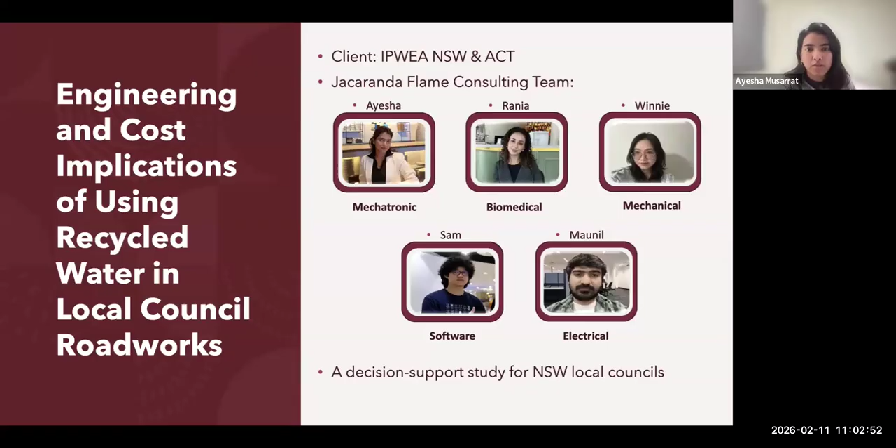This study examines how recycled water can be used in local council roadworks across NSW in a way that remains technically reliable, compliant with existing regulatory frameworks, and operationally practical for councils. Rather than focusing on whether recycled water can be used in principle, our work concentrates on identifying when its use is appropriate in practice, where the real engineering and operational risks arise, and what verification steps councils would need to make confident decisions.

The motivation for this study began with growing water scarcity pressures across many regions of NSW, which are prompting greater consideration of alternative water sources in construction activities. Across both the literature and industry consultation, we observed that councils are increasingly encouraged to consider recycled water due to water scarcity and broader sustainability objectives. However, once recycled water enters the discussion, councils often face uncertainty, not only around engineering suitability, but also around cost behavior, logistics, and compliance expectations.

These uncertainties can slow adoption, even where recycled water may be technically viable. This creates the need for a structured decision support framework that links engineering feasibility, regulatory requirements, and delivered cost considerations into one single practical pathway, enabling councils to adopt recycled water where it is justified while maintaining engineering performance and compliance.

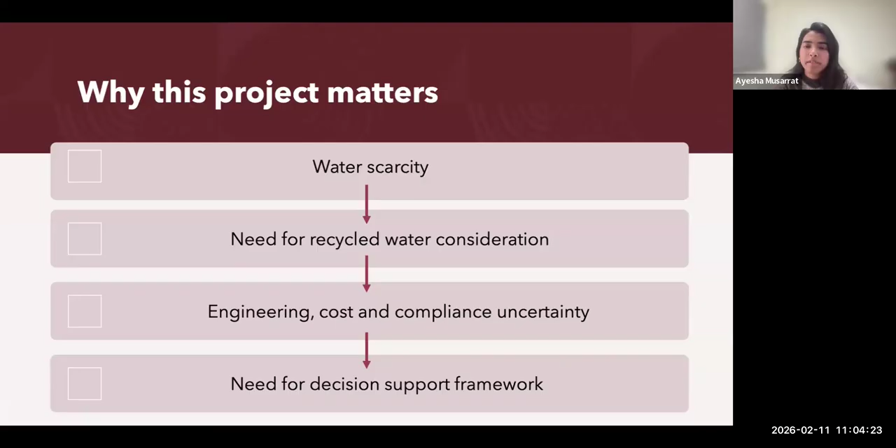In response to this need, this project focused on applications where councils most frequently make operational water source decisions, particularly dust suppression and compaction, and evaluated them through both engineering and cost lenses.

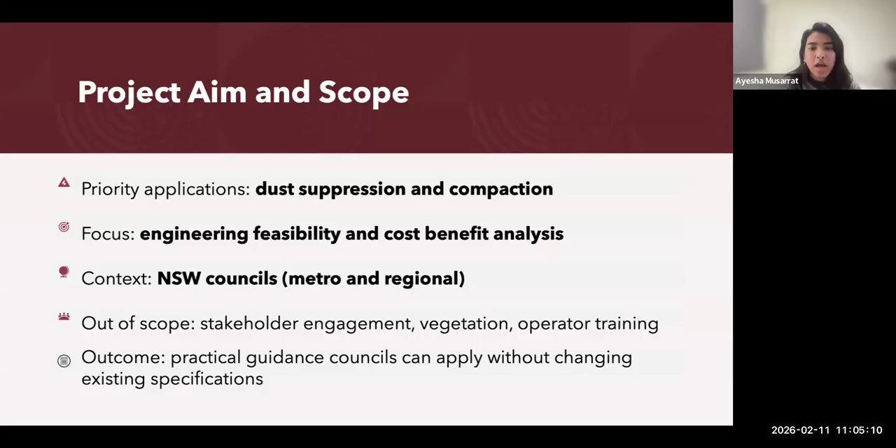Our project was not to introduce new technical limits, but to translate existing specifications and guidance into clear decision triggers that councils can apply consistently across both metropolitan and regional contexts. The intended outcome is practical guidance that fits within current standards and procurement processes, allowing councils to make defensible site-specific decisions without needing to change existing specifications.

To develop this framework, we followed a structured process. We began with a review of prior JFC work, regulatory guidance, Australian standards, and transport specifications to identify the engineering constraints that actually influence recycled water feasibility.

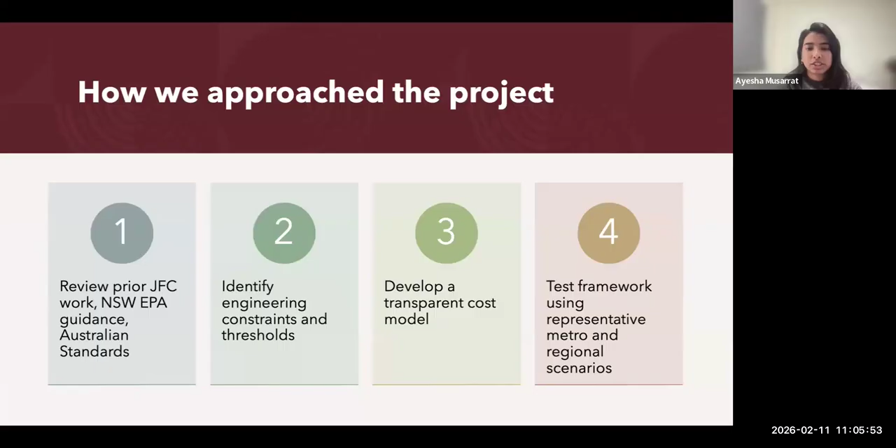We then developed a transparent delivered cost model that captures both water acquisition and logistics factors, before applying the combined engineering cost framework to representative metro and regional case scenarios. This allowed us to test how decisions change depending on local conditions rather than relying on a single generic assumption.

Building on our overall approach, we looked at how councils actually decide whether recycled water is an option for roadworks. One key finding is that recycled water isn't governed by a single rule. Instead, it sits across several frameworks that each deal with a different part of the decision.

At a national level, AGWR provides a risk-based foundation focused on health and environmental protection. It's not road specific, but it does apply to construction activities like dust suppression and compaction. The NSW EPA and NSW Health then turn that into practical constraints around when recycled water can be used and how exposure is managed on site. In parallel, Austroads also provides performance benchmarks that still apply irrespective of whether potable or recycled water is used.

The key message for councils is that recycled water is not excluded by default. Rather, its use depends on demonstrating suitability through appropriate risk controls and technical verification.

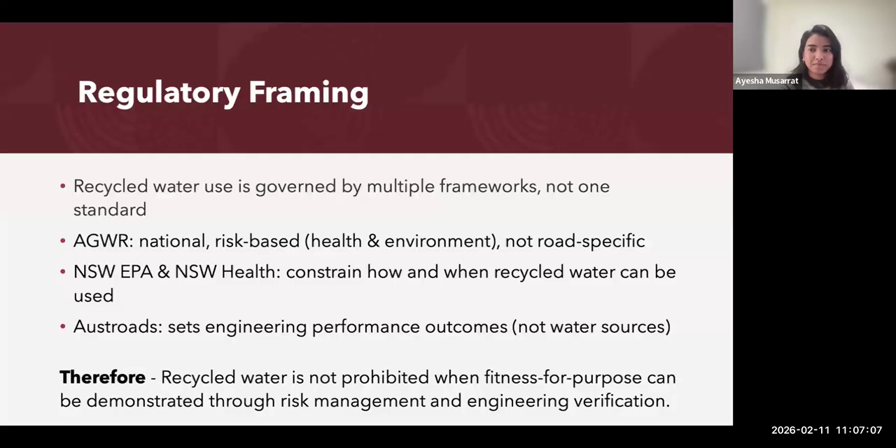We'll now take you through the technical considerations of the project.

Once councils know recycled water can be an option, the next question is usually, what do we actually need to worry about? The literature is surprisingly consistent on this. From an engineering point of view, most of the sensitivity comes back to how water interacts with soil, especially during compaction.

That's why salinity, or EC, is the main driver of engineering sensitivity, because it can affect moisture to density behavior and durability. Closely linked to that is SAR, which becomes important in clay-rich soils due to dispersion and soaked strength effects. On the other hand, things like turbidity and solids don't usually change pavement strength, but mainly affect operational reliability, like spray systems and downtime. Parameters like pH and specific ions are generally secondary, unless stabilization or concrete is involved.

Rather than asking councils to assess everything, the evidence supports focusing decision making on a small practical subset of parameters, especially salinity and SAR.

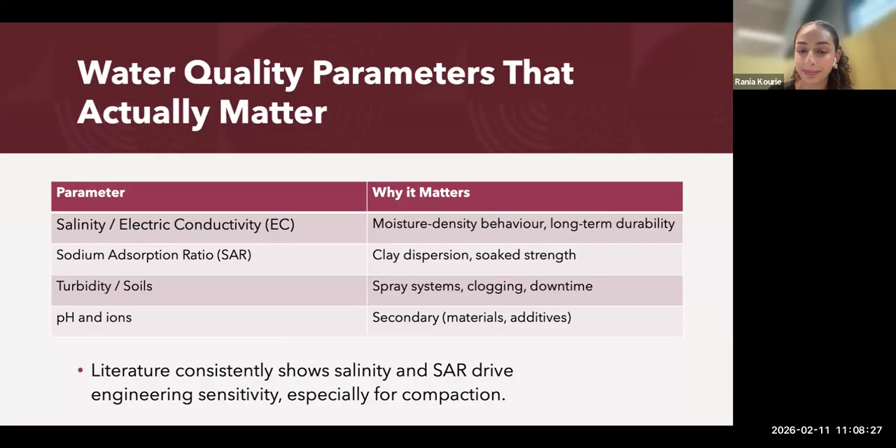When we translate the water quality evidence into actual roadworks, the level of risk really depends on the application. For dust suppression, recycled water is generally a low structural risk—the water stays at the surface, so the focus is on exposure, runoff, and day-to-day operational reliability. Compaction is where the risk concentrates, so water chemistry can affect soil behavior and longer-term performance, even when density targets are met on the day.

Concrete is different again because it's governed by AS 1379, so suitability is demonstrated through testing and compliance, not engineering judgment. But the key takeaway for councils is that short-term construction checks don't always tell the whole story. That's why the literature supports a risk-based approach, using verification where sensitivity is high, rather than assuming recycled water behaves the same as potable water.

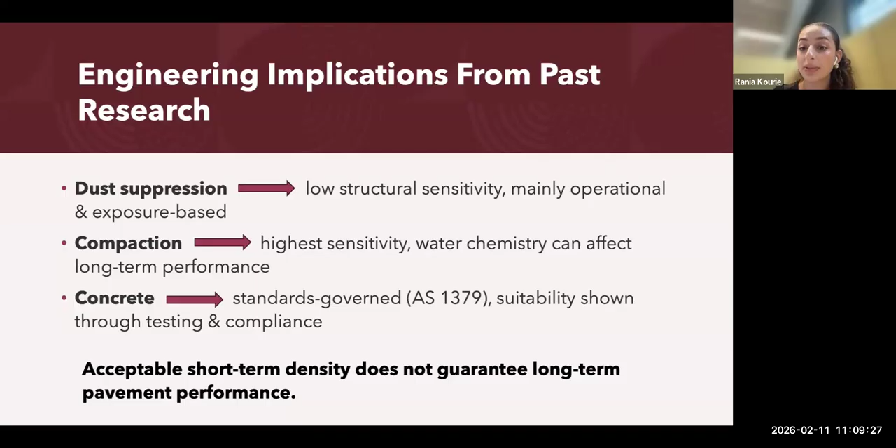And that becomes especially important for stabilization, which is why the next section looks at stabilization as a special case.

So while compaction is the most sensitive routine application, stabilization really sits in its own category, which is why we looked at it separately. It's already a tightly controlled process where performance is driven by moisture, mixing, curing, and quality assurance, with the water source just being one input.

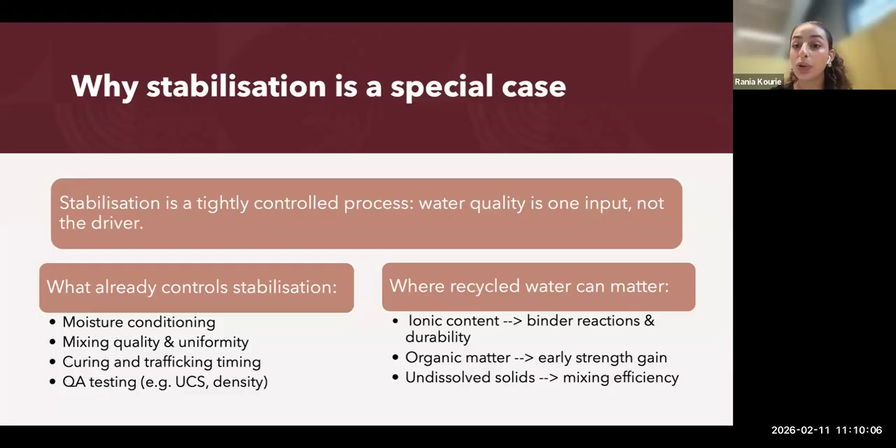So the key question for this project wasn't whether recycled water changes stabilization, but whether it adds uncertainty beyond what engineers already manage. From the literature, that uncertainty mainly comes from chemistry, where salts can affect binder reactions, organics can slow early strength, and solids can influence mixing quality.

That doesn't necessarily make recycled water unusable, though. It just means that it shouldn't be assumed equivalent to potable water without checks. So for stabilization, the real issue isn't compatibility, it's verification and confidence.

A useful finding from this work is that New South Wales already has decision thresholds in place. Existing Transport for New South Wales specifications set limits for chlorides, sulfates, solids, and microbiological indicators for when recycled water is used. So we're not proposing new limits, we're simply showing how these existing limits can be used as clear screening points.

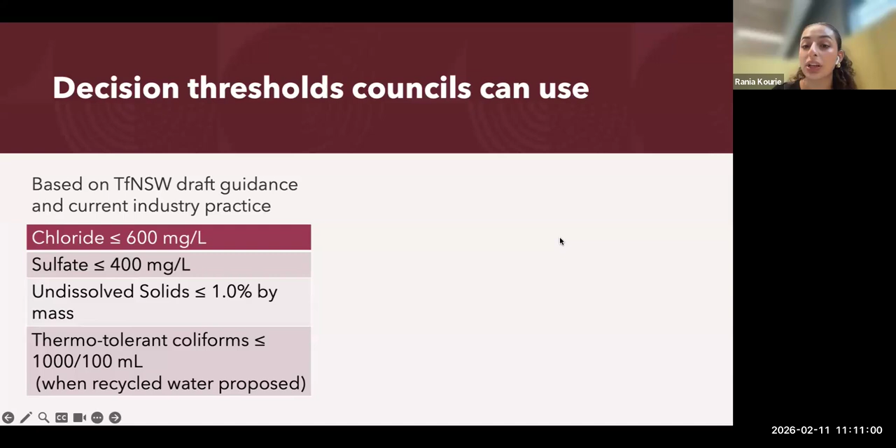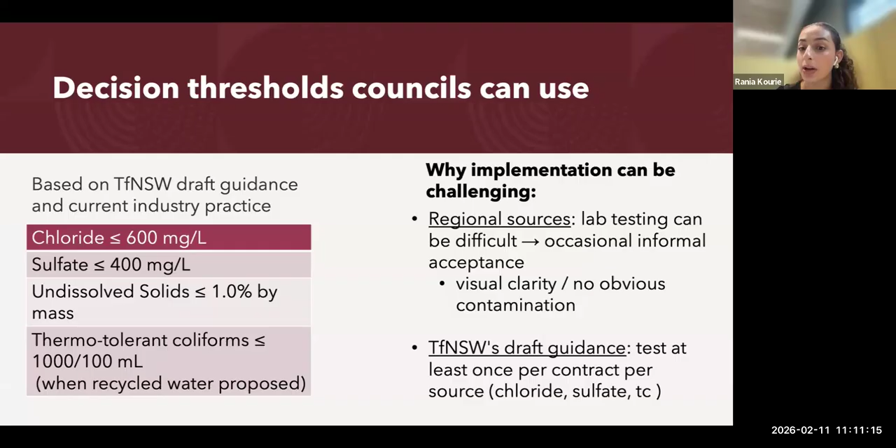This is especially important in regional areas where regular lab testing isn't always easy. That's why our framing of this suggests baseline testing per contract and per source—enough to maintain confidence without necessarily overcomplicating any projects.

This slide puts everything together into a simple decision pathway for councils. First you identify the stabilization method and the relevant TfNSW specification because limits depend on the engineering context. Next, you confirm the water source and whether access and continuity are actually realistic on site. You then apply a basic threshold screen.

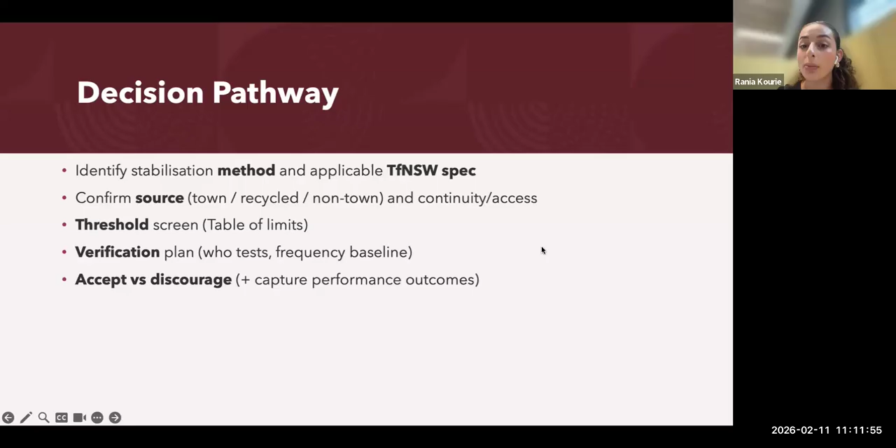If the limits can be met, the focus shifts to verification—who's testing and how often? Where limits are met and verification and QA are strong, recycled water is conditionally acceptable. If limits can't be met or verified, recycled water becomes higher risk and is generally discouraged for councils to use. So the key point is that this pathway doesn't add new rules, it just organizes existing ones in a consistent way.

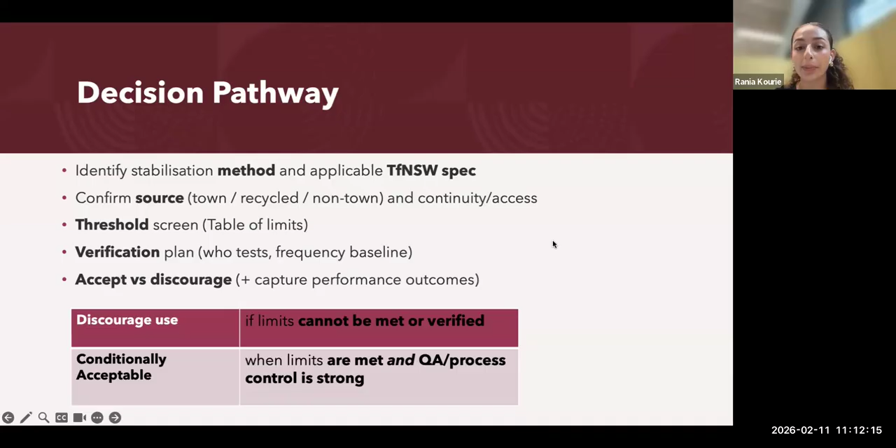Industry feedback supports this. Contractors indicated that potable water is usually used because it's easier to access and verify, not because recycled water fails. Where recycled water meets specification limits and stabilization controls are strong, there's no evidence of inherent incompatibility. So in practice, stabilization decisions come down to confidence in verification, traceability, and process control rather than concern about the recycled water itself.

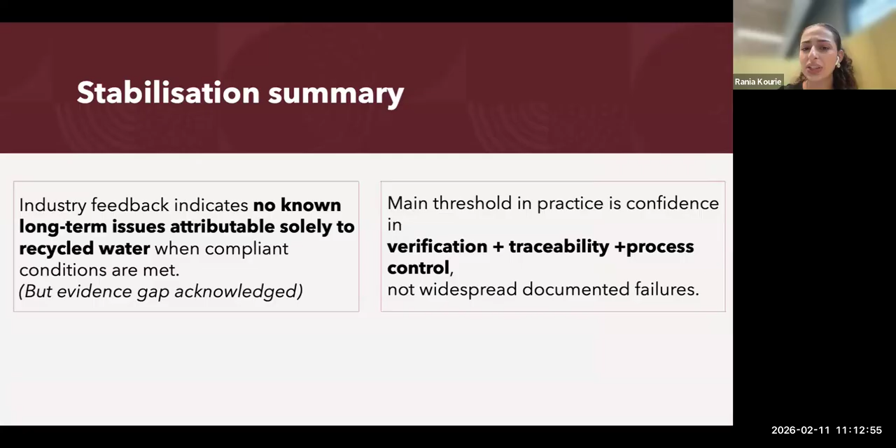So once we understand where recycled water makes technical sense, the next question councils always ask is, what does it cost? I'll hand over to Sam, who will walk us through the cost model and how these technical decisions actually translate financially.

All right, thank you. So I'll be talking about the cost model structure. This will be used in the coming sections, which will have case studies that go through the technical framework previously mentioned and the cost model structure, which I will talk about.

The purpose is to compare delivered cost of different water sources through different conditions. The tanker volume from research is around 8 to 12 kiloliters, and with council contact we are told to assume around 10 kiloliters per load as an average, unless specified otherwise. The scope is that this is an indicative planning model, not tender pricing or some kind of financial strategy.

So in terms of the variables we will put in, we can go next.

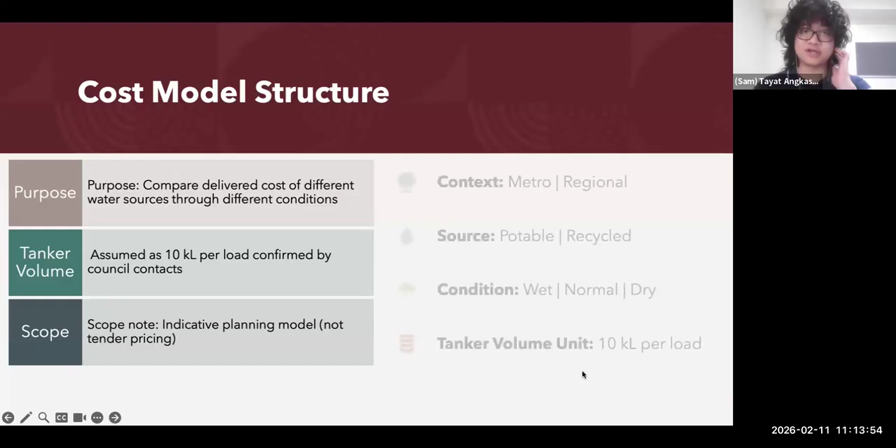The context will be between metro and regional council, where in our case we are using Fairfield and Tweed Shire Council as comparison. The source is potable water versus recycled water in three conditions: wet, normal, and dry, and the tanker volume unit previously mentioned, 10 kiloliters unless specified.

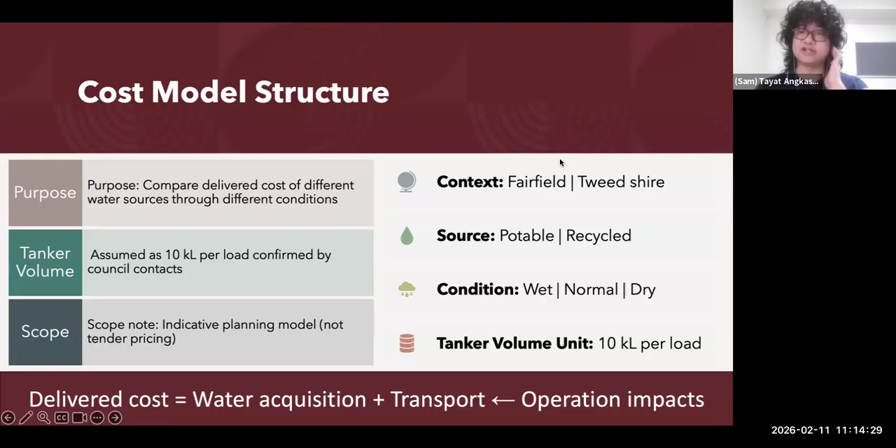The final delivered cost model will be the sum of water acquisition costs, travel costs, and in case operation impacts affect that transportation cost. We also identified that transportation cost is the main cost driver.

The water acquisition cost requires the price at fill point and tanker volume, unless specified. The tanker volume will be assumed as 10 kiloliters per load, as mentioned. The potable water is usually easier to find the cost for directly, so this model may apply a bit better for recycled water.

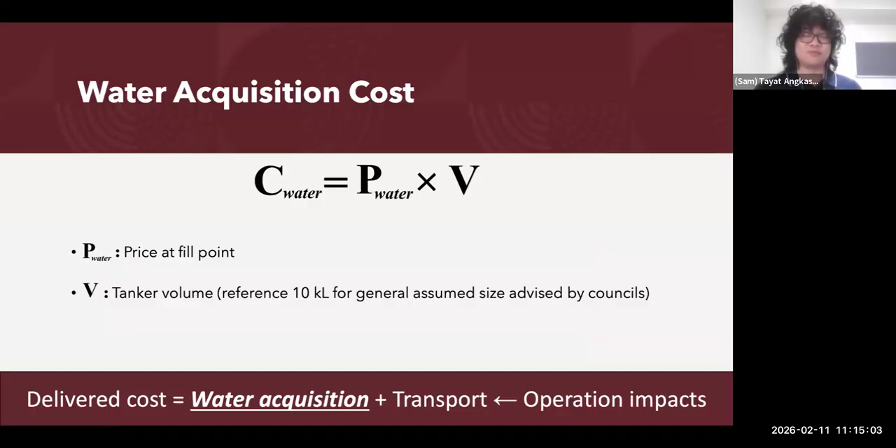Next, the transport cost is modeled on a time basis. Usually water carts are commonly hired on wet hire or hourly rates. Let's define wet hire: it refers to hiring equipment alongside an operator or driver, where usually fuel or other standard operating costs are considered within the hourly rate, but they may vary depending on the contractor.

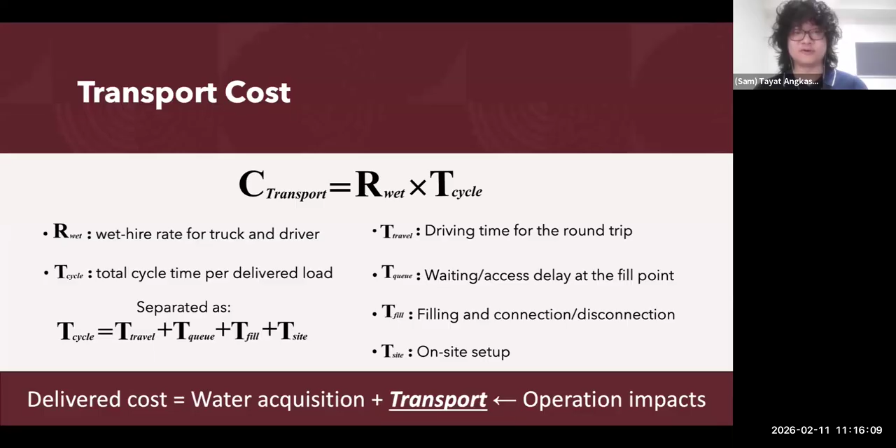The total time cycle for one delivered load is split into four sections as shown. Travel time is to go towards the destination and back. The queue time is waiting for access if there's other tankers or people on site. The fill time is to fill the tank and connect, disconnect, and other on-site operations.

This is if the operation impacts have a noticeable impact towards the transport cost change. We use lambda to represent the fraction of time lost to downtime, where near zero is considered negligible, and near one as a major impact, which high impacts will cause the increase in time and therefore the cost.

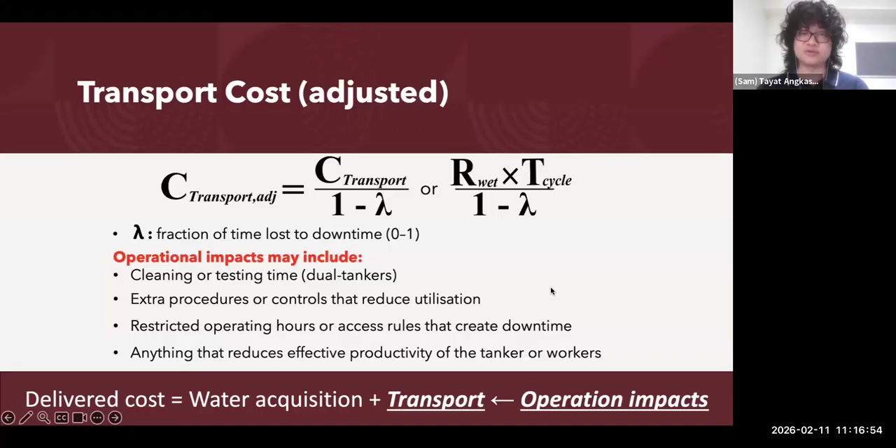The operational impacts can represent things like cleaning and testing when switching between recycled and potable use. Dual tankers require extra cleaning and may cause more delays compared to normal tankers. There are also access restrictions or extra procedures that slow turnaround, or anything else that reduces effective productivity. You can think of lambda as a fraction of paid time you can't spend doing delivery, like a percentage.

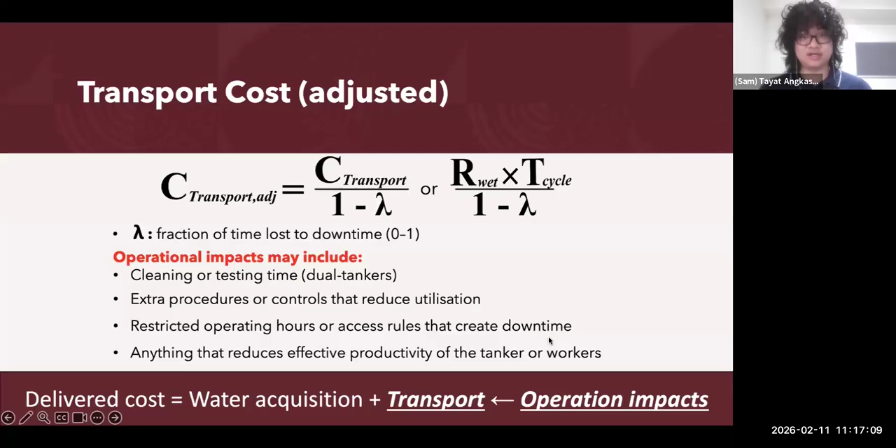In different conditions, these variables may be affected. For example, increased time leads to increasing wet hire cost, or in a dry period, demand and restrictions may cause delays, or some fill points may be considered unusable or unreachable, so they have to change to different operating sites, increasing distance or changing the queue time in that case.

Any on-site operations and travel speed can vary with congestion, site access, or operating rules or restrictions. There may also be more downtime or utilization costs, especially in dual-use tankers, which may need extra cleaning and testing. So increasing time or damaging equipment will most likely increase costs overall.

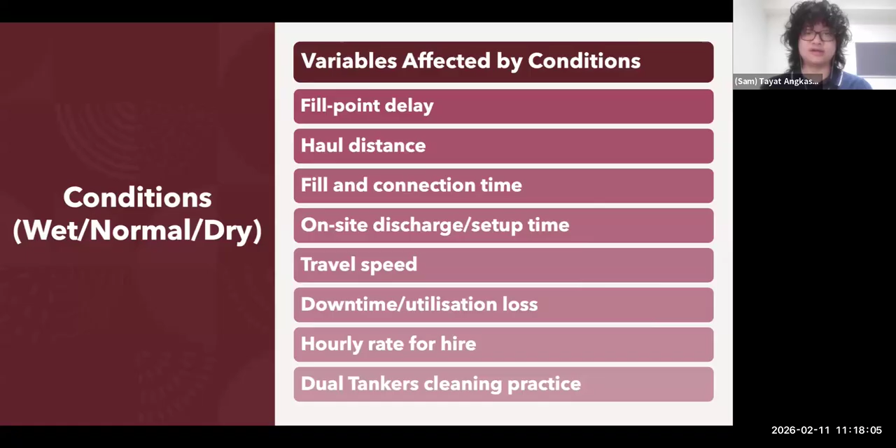In summary, we compared delivered costs per 10 kiloliters load across the scenario by changing the council context between metro and regional—in our case, Fairfield and Tweed Shire—the water source between potable and recycled, and within three conditions of wet, normal, and dry. The delivered cost is split into three parts: water acquisition cost, transport cost, and, if operation impacts apply, their effect on overall transport cost.

The aim is to create a consistent structure that councils can populate with local values, and unless specified, you can use an assumption like 10 kiloliters per load for a quick comparable cost check. As mentioned before, this is not a financial strategy or tender pricing. I'll hand over this to the next person.

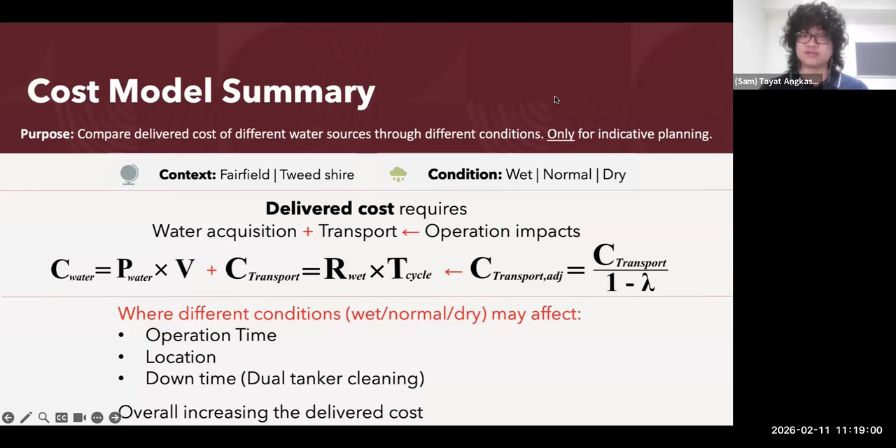The next section will focus on the metro and regional case studies. Winnie will walk through the outline of the case study, which will use the previous technical frameworks previously mentioned, and then the cost framework I just talked about.

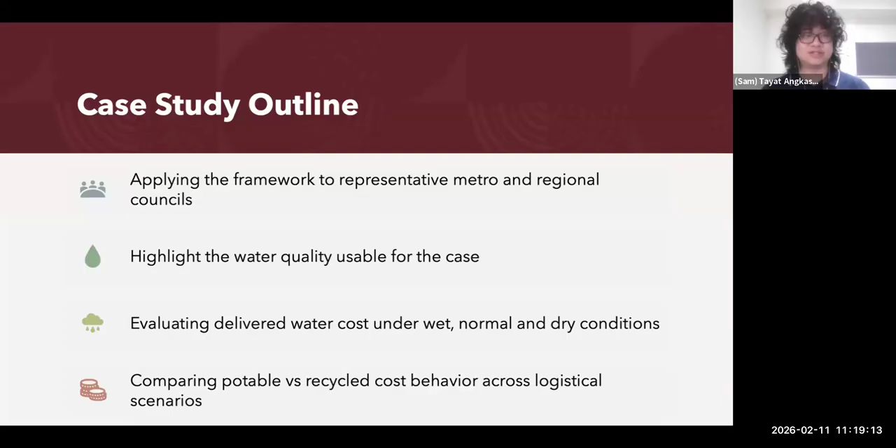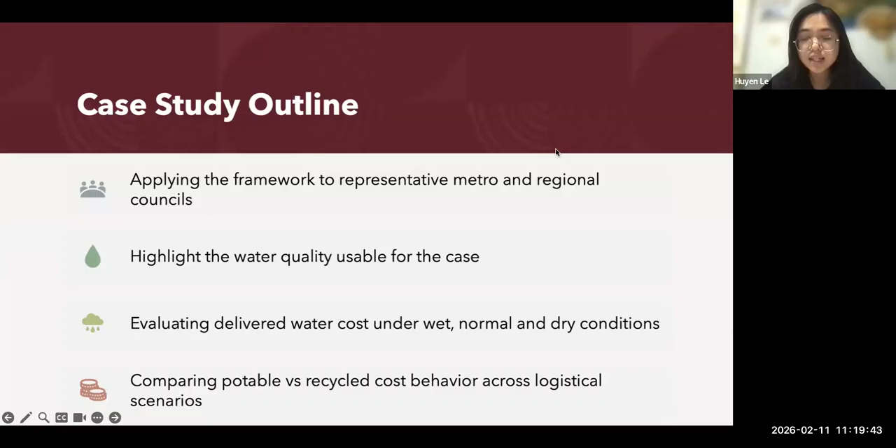In the next slides, the cost framework will be applied to Fairfield and Tweed Shire City Council as representatives for metro and regional councils. For each case study, the water source and quality will be assessed, and the cost will be considered under different circumstances, including wet, normal, and dry. At the end of this section, a comparison will be introduced to highlight the impact of metro and regional unique characteristics on water costs.

First is the metro case study for the project, and we're focusing on Fairfield City Council. Fairfield is a good metro example because recycled water is already available through a major scheme, the Rose Hill Recycled Water Scheme, which supplies industrial customers across Fairfield, Cumberland, and Parramatta areas.

In simple terms, Rose Hill Recycled Water Scheme starts with secondary treated wastewater from Sydney Water. That water is conveyed through the Liverpool to Ashfield pipeline to the Fairfield Advanced Water Treatment Plant, where it is upgraded to a higher quality using advanced treatment processes. After treatment, recycled water is stored on site and then pumped into the distribution system.

The scheme then delivers recycled water to its main customers through a dedicated network. That network includes roughly 20 kilometers of pipeline supported by two pumping stations, Fairfield and Rose Hill, and two reservoirs, Woodville and Rose Hill.

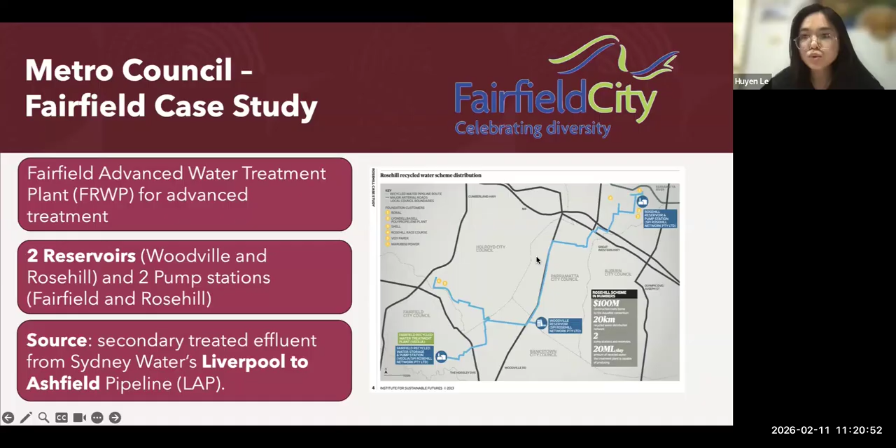There are some requirements for the recycled water that are listed by the council, including total dissolved solids less than 50 milligrams per liter, and pH level ranging from 6.5 to 8.5, and so on. This requires the advanced treatment process to conduct the following methods: strainers, ultrafiltration, reverse osmosis, and so on.

For Fairfield, we estimated the delivered cost per 10 kiloliter load for both potable and recycled water under wet, normal, and dry conditions. The totals range from about 209 to 268 per load. The key message is that transport dominates the result. Transport is roughly 181 to 233 per load, while the water procurement component is only about 29 to 36 per load. So the truck wet hire time is doing most of the work in the total cost.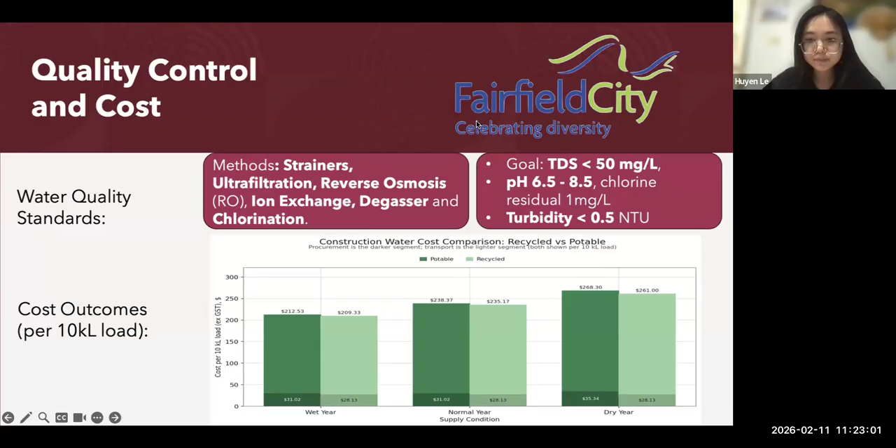Now I hand over to Mauni for the regional case study and the comparison.

Building on the metropolitan case study at Fairfield, I will now move to the regional context and present the Tweed Shire case study, which highlights how construction water costs and recycled water benefits change outside the metropolitan settings. Tweed Shire Council manages its own potable water and wastewater system, sourced mainly from the Tweed River catchment, with Clarrie Hall Dam providing drought resilience.

Tweed produces recycled water from its local wastewater treatment plants, currently supplying golf courses, sports fields, tree plantations, and various industrial precincts, demonstrating that fit-for-purpose reuse is already operational and reliable. Recycled water is treated to AGWR Class A using secondary filtration and chlorination. This delivers water quality that is fully suitable for dust suppression and earthworks compaction without the high cost of advanced metropolitan treatment like reverse osmosis.

For this case study and construction use, recycled water is supplied via controlled tanker delivery from approved bulk filling stations, with a typical haul distance of 20 kilometers.

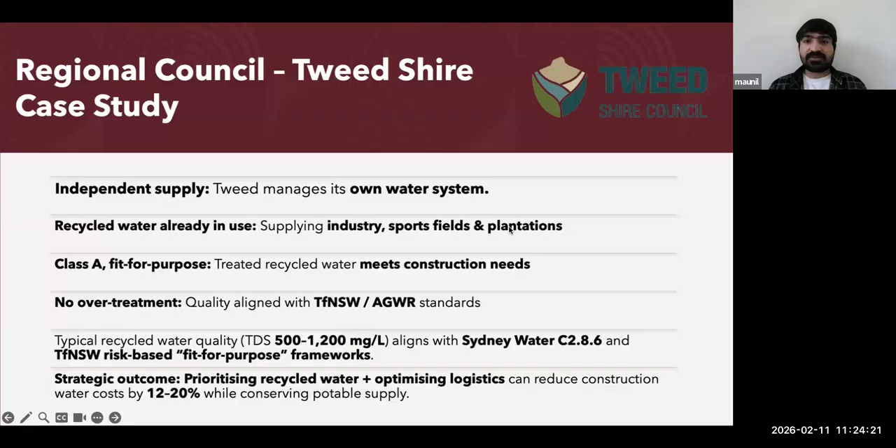In dry potable scenarios, additional allocation and scarcity related costs appear, increasing the total cost noticeably compared to recycled water. The key takeaway is that while switching to recycled water reduces cost, logistics efficiency—that is haul distance, trip time, and wet hire—has the largest influence on total construction water costs.

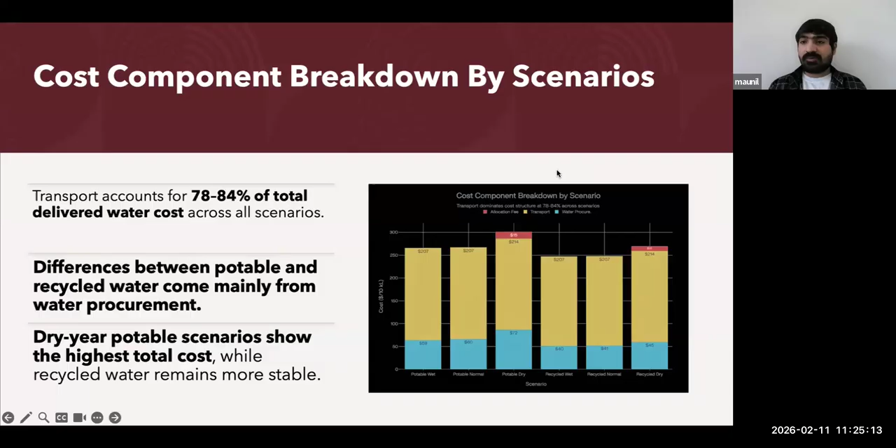The increase in savings during drought is driven by sharper price escalation in potable water, while recycled water pricing remains comparatively stable. The main key takeaway is that recycled water is always cheaper, but its greatest value is realized during drought when cost pressures and water scarcity are highest.

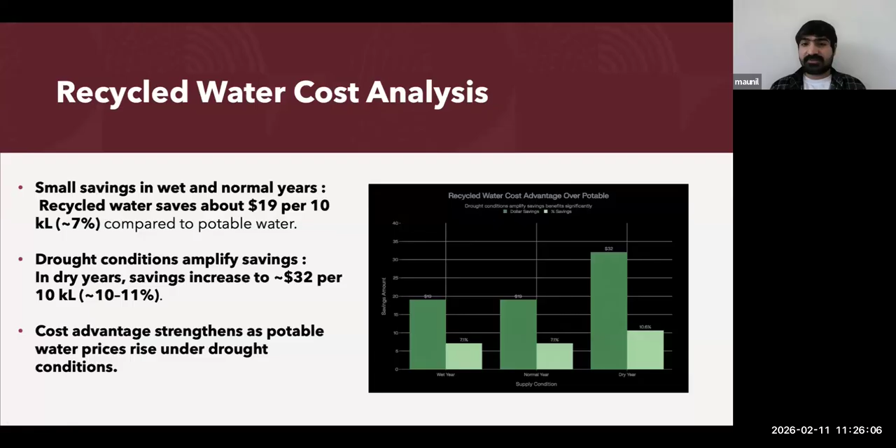During drought conditions, potable water costs rise sharply in both locations, but recycled water remains more stable, increasing the saving to about 8% in metro areas and over 11% in regional areas. Overall, transport makes up the majority of total cost in both cases, around 75 to 84%, confirming that logistics, not water price alone, drive overall construction water economics.

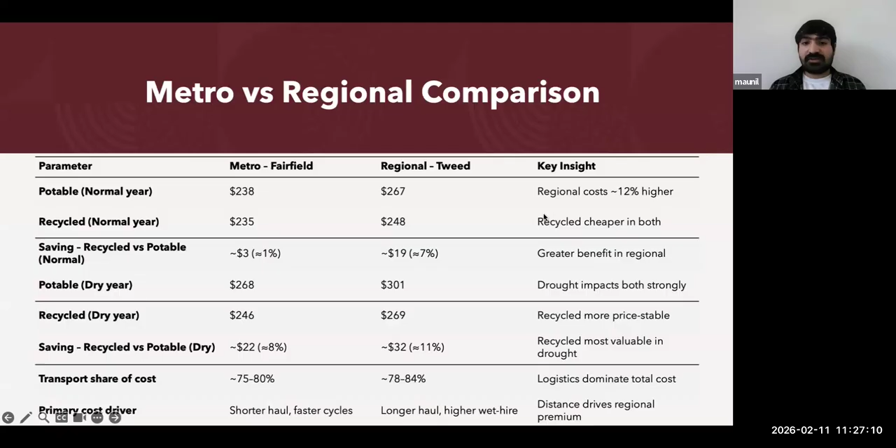So now I will hand over to Ayesha for discussing further project outcomes and implications.

Stepping back, the project all in all delivers three key contributions for councils. First, an engineering feasibility framework that distinguishes between lower sensitivity and higher sensitivity applications, helping councils understand where recycled water can be adopted more readily and where additional verification is required.

Second, a logistics-aware cost model that reflects how distance, access, and operational conditions influence delivered cost, often more strongly than the water tariff itself. And third, a practical decision support pathway that integrates these technical and cost considerations, enabling councils to move from uncertainty toward defensible, evidence-based decisions.

For IPWEA and councils, an important implication is that recycled water decisions do not have to be treated as all-or-nothing choices. Lower sensitivity uses can often be adopted more readily where basic controls are in place, while higher sensitivity applications can be approached conditionally, with verification targeted where it provides the most value.

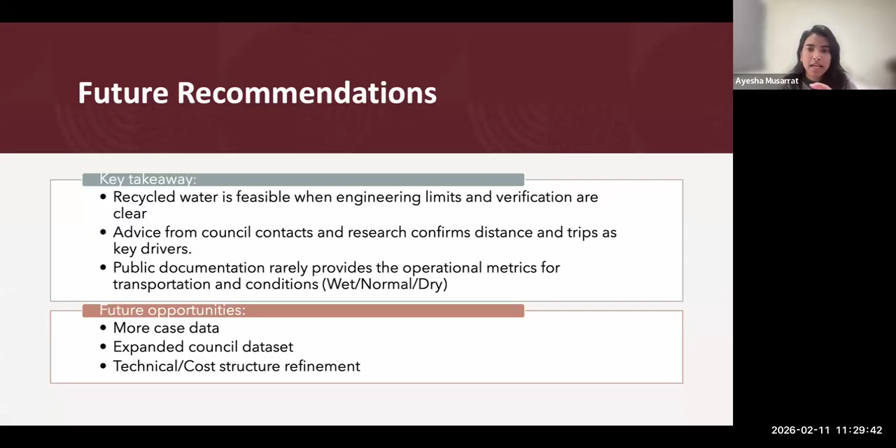Yeah, I do have a question actually. Can you hear me? Yeah, we can. Cool. So I'm from BC Council, and I've looked into the possibility of using recycled water. We're very regional with very long travel between the recycled water outlets.

I was wondering if you got information regarding the Tweed case on their approvals that they had in place from the EPA, if it was a blanket approval to use recycled water in construction projects, or if they had to seek approval each project.

I think we tried looking into that, but I'm not sure we were able to find information on whether... I think we concluded that for each project they had to get separate approvals. Mauni, would you like to step into this? Can you confirm that for us? I think we had a discussion with the team. He just gave us the normal criteria for that, but for the one which she is talking about, I really don't know about that one.